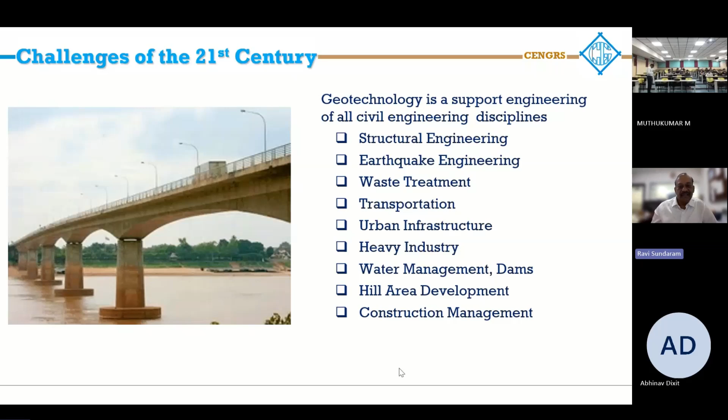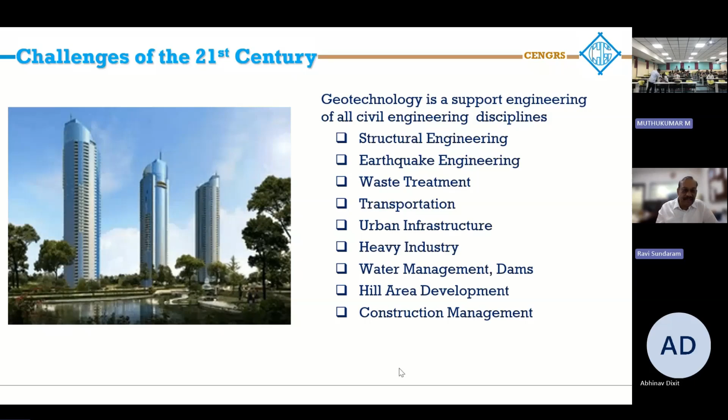So we have to be aware of the challenges of the 21st century. As you know, geotechnology is a supporting discipline for all civil engineering disciplines. And whatever you do, geotechnical engineering is the starting point. Whether it is structural engineering, earthquake engineering, wastewater treatment, transportation, urban infrastructure, heavy industry, water management, dams, hill area development, construction management, everything requires the inputs of a geotechnical engineer.

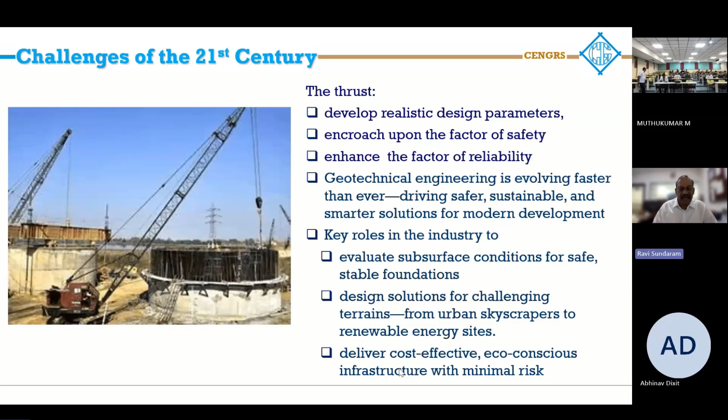The thrust has to be to develop realistic design parameters, maybe encroach upon the factor of safety, but enhance the factor of reliability. So safety versus reliability, that's very important. Today, geotechnical engineering is evolving faster than ever, driving safer, sustainable, and smarter solutions for modern development.

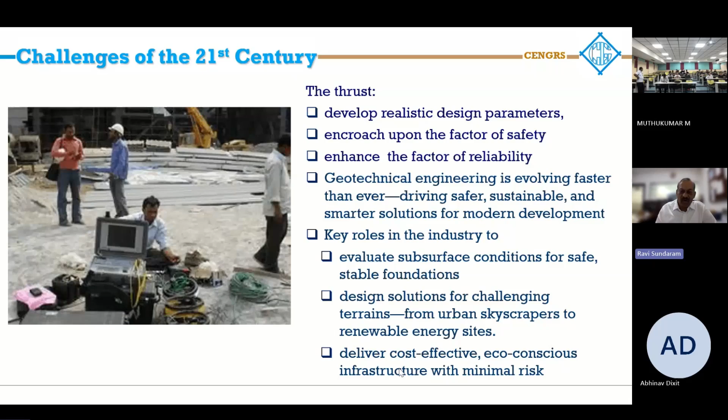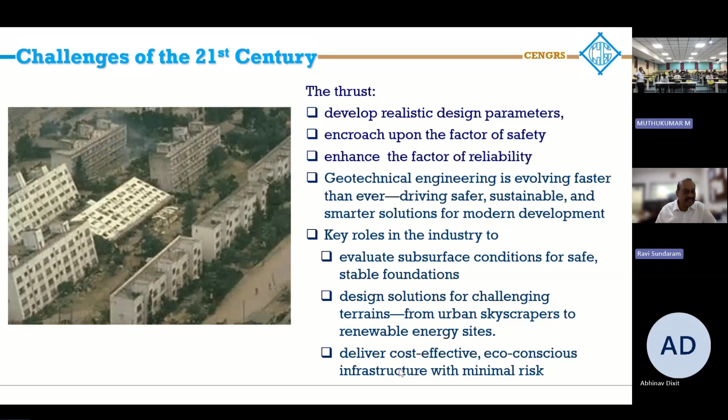So the key role in the industry for the geotechnical engineer is to evaluate the subsurface conditions for safe and stable foundations, giving design solutions for challenging terrains, from urban skyscrapers to renewable energy sites to hill areas, deliver cost-effective and eco-friendly, eco-conscious infrastructure with minimum risk.

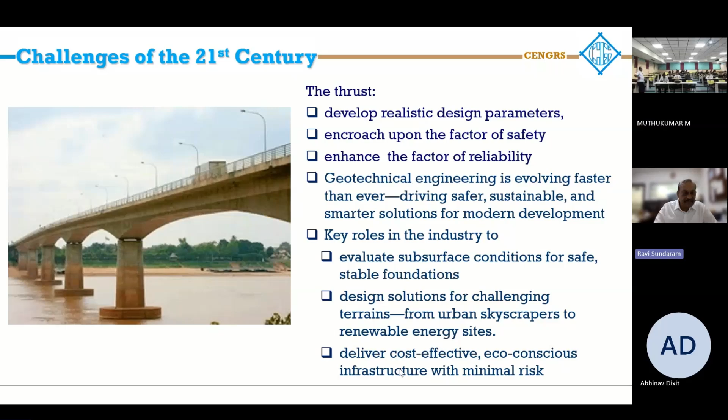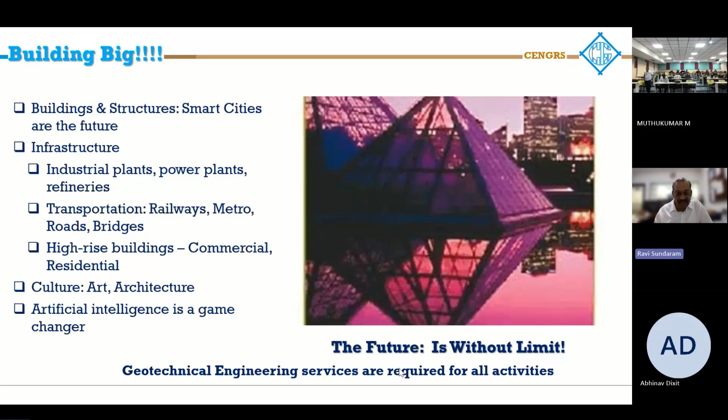Now, today we are talking about building big. Smart cities are the future, and tall buildings, heavy industry, infrastructure like industrial plants, power plants, refineries. In the transportation sector, we have railways, metros, roads and bridges, high-rise buildings, commercial as well as residential, culture, art and architecture. Now artificial intelligence is a game changer, and things have changed a lot with the introduction of artificial intelligence. But for the geotechnical engineer, the future is without limit because geotechnical engineering services are required for all activities.

Let's look at the challenges. Tall buildings, we are talking about 30, 40 story to 100-story buildings, multiple basements, 3, 4 basements also are coming up now, thermal and solar power plants, heavily loaded industrial buildings, bridges and embankments for highways and railways. Now, there is a lot of variation in the ground profile along the alignment of metro tunnels, highways and railways. Expansive soils is another challenging problem which has to be resolved, particularly in the Deccan area.

Construction in weak and poor ground, liquefiable soils. Earthquake is a very critical issue. Fractured rock, hill area development, landslides, dams, embankments. All these things now the geotechnical engineer has to take care of.

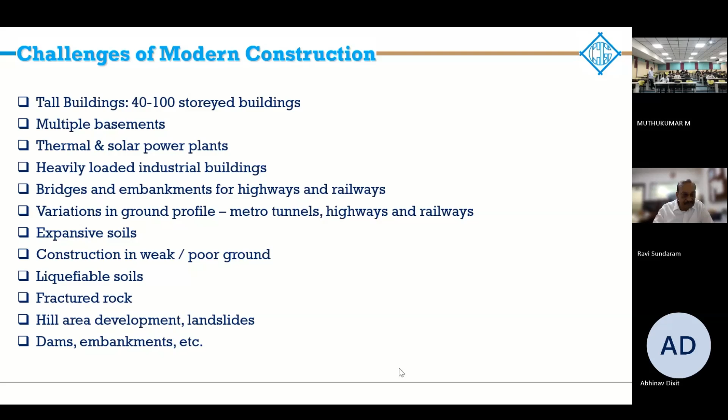And now the projects are all fast track projects. So the demands of fast track projects are that you have to have safer, sustainable, and smarter solutions. You have to come up with solutions for complex problems in minimum time, respond quickly to keep up with the pace of demands of these projects. So design parameters have to be more realistic. Conventional approaches may just not be enough.

You can't talk about a very high factor of safety. You have to squeeze the factor of safety, but you have to make sure that innovation, safety, and economy go hand in hand. So the geotechnical engineer plays a key role in evaluating the subsurface conditions for safe and stable foundations, designing solutions for challenging terrains, delivering cost-effective and eco-conscious solutions. This shall empower the geotechnical engineer to create safe and sustainable future-ready infrastructure, bridging technology with environmental responsibility.

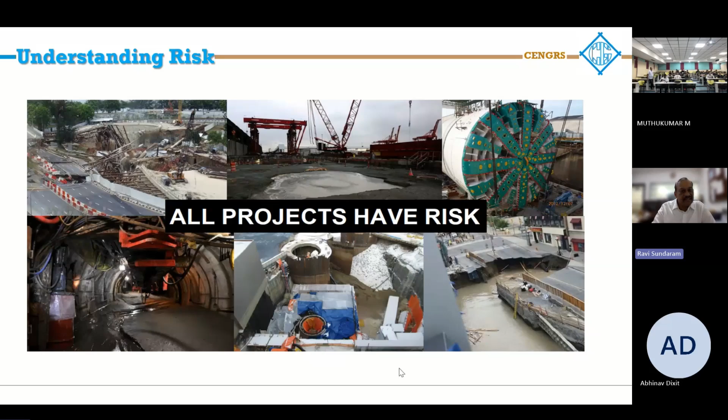Let's try to understand risk. Every project has a risk, and risk is there everywhere when you start geotechnical civil engineering projects. But inadequate geotechnical assessment can lead to incorrect decisions.

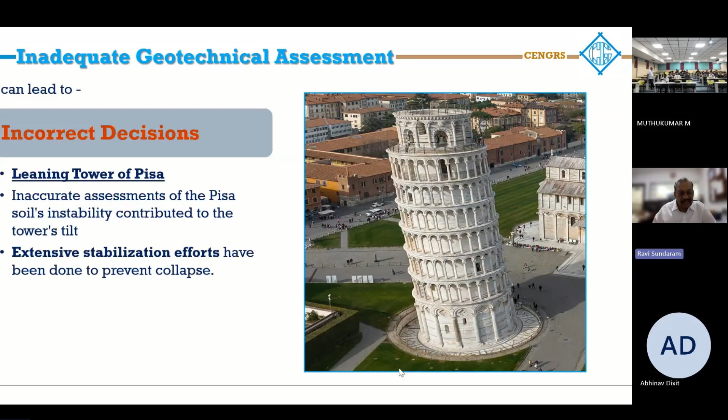The famous Leaning Tower of Pisa, inaccurate assessment of the soil condition stability contributed to the tilt. Extensive stabilization efforts have been done over the past 2 decades to prevent the collapse of this tower.

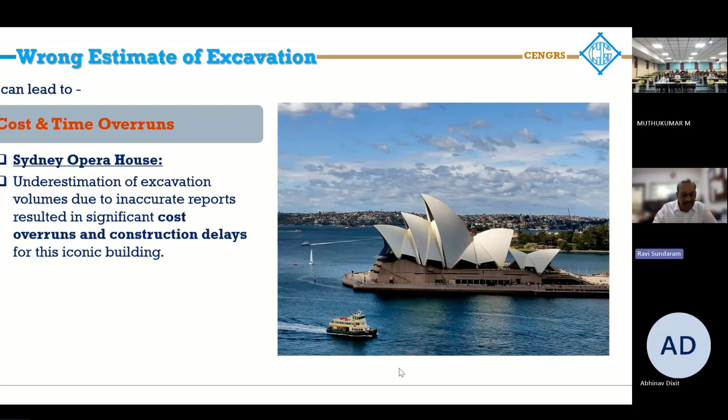Wrong estimate of excavation quantities, the Sydney Opera House, it resulted in cost and time overruns and resulted in significant construction delays for this iconic building.

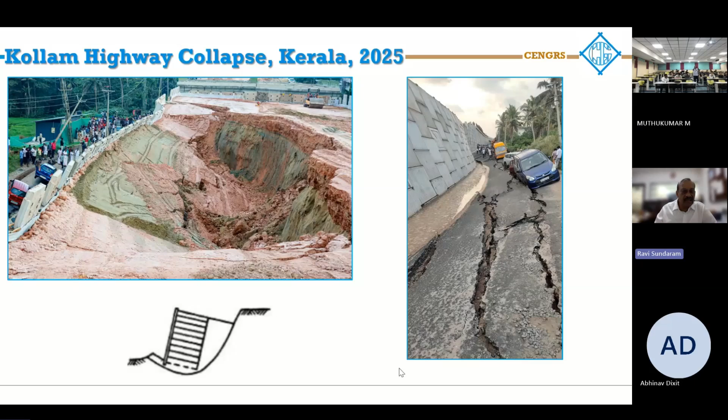Very recently here in Kerala, there was a highway collapse. You can see the consequence of this collapse. So catastrophic failures like the bridge in Bihar, this excavation in Bombay, and here, this is the TBM collapse in Kolkata.

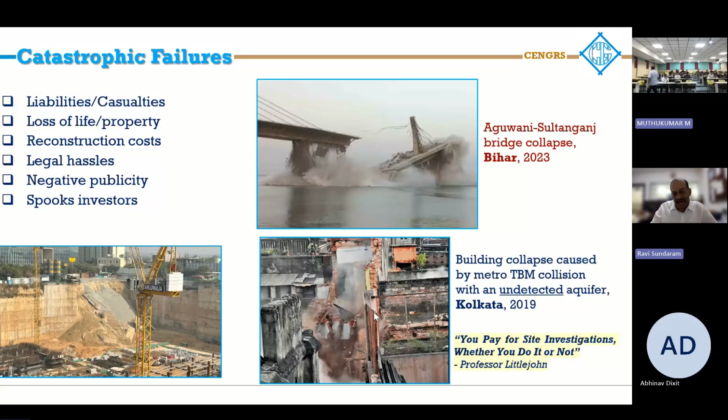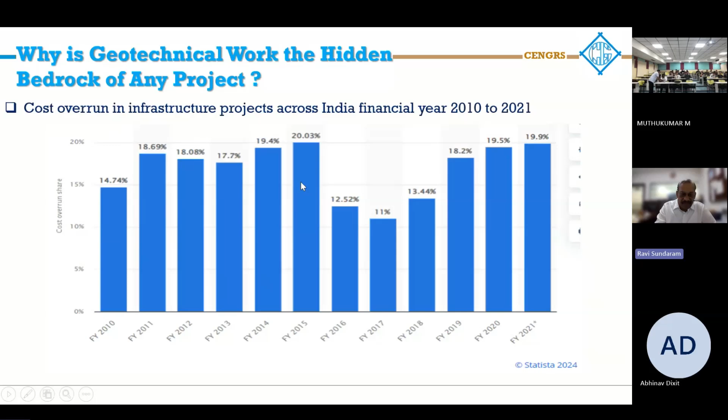Now, you have to be aware that whether or not you do the site investigation, you end up paying for it. So that's what you have to be aware of. Geotechnical engineering is always the hidden bedrock of any project. You can see that from 2010 to 2021, cost overrun on infrastructure projects has been nearly 18 to 20%, and primarily, most of this is due to foundation issues.

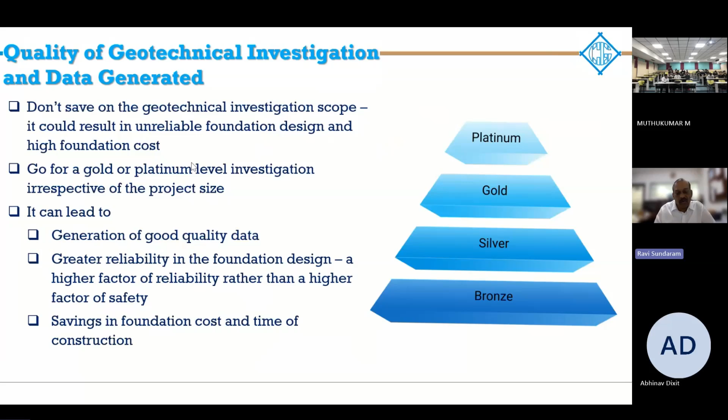Geotechnical investigation practices have undergone revolutionary changes in the past two decades. Conventional boreholes with SPT, sample collection, and laboratory testing are now being supplemented with several in-situ tests to model soil behavior. These include SPT energy measurement, electric cone penetration test with pore water pressure measurement, pressuremeter tests, geophysical tests, and various other tests.

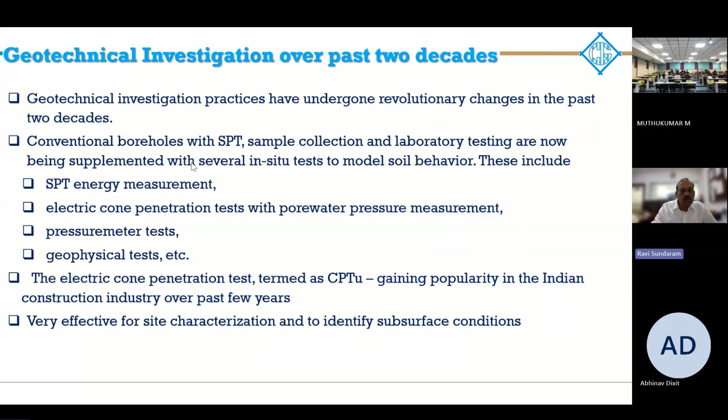The electric cone penetration test, also called CPTU, is gaining popularity in the Indian construction industry over the past few years. It is very effective for site characterization and identifying subsurface conditions. So these tests should be included in the scope of the investigation.

I'm now going to present three case studies illustrating the application of geotechnical engineering concepts for foundation design in various challenging situations. The first one is a 42-storied residential commercial tall building in Gurgaon, Haryana; grain silos in rural Kanpur, UP; and wind turbines in liquefiable silts in Kutch, Gujarat.

The first case study is a 42-storied residential commercial building, a tall building in Gurgaon. The site covers an area of about 11.4 acres, a high-rise housing complex consisting of 11 towers of 42 stories each, with 2 basements. Other facilities planned include a clubhouse, tennis and volleyball court, swimming pool, etc.

The project is planned in 4 phases: 3 towers, clubhouse and swimming pool in the first phase, 3 towers in the second phase, 2 towers in the third phase, and 3 more towers in the fourth phase. The tower building is a framed structure with a podium.

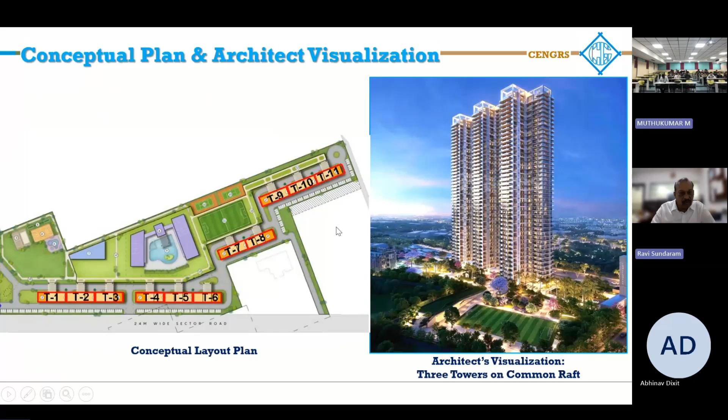The investigation scope covered 22 boreholes to 60-meter depth and 5 to 30-meter depth. SPT energy transfer ratio was measured for the rigs used; in this, you standardize the SPT value corresponding to 60% energy transfer. 43 electric cone penetration tests were also done, and pressure meter tests were done in 4 boreholes.

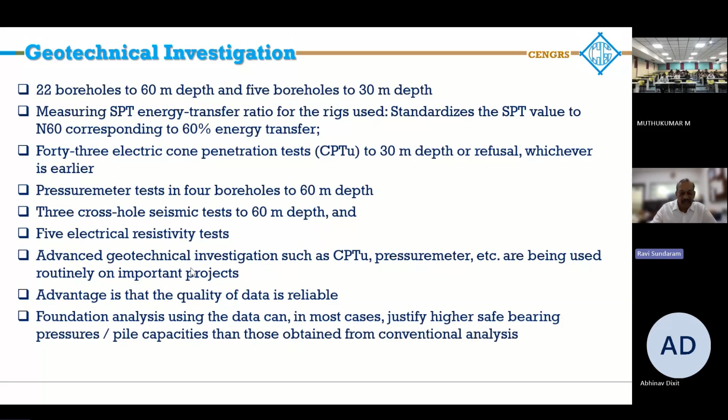3 crosshole seismic tests were done to 60-meter depth, and 5 electrical resistivity tests. So advanced geotechnical investigation methods like CPTu and pressuremeter are now being routinely used on these important projects. The advantage is the quality of data is reliable, and you can justify higher bearing capacities in most cases, and higher pile capacities compared to what you can get from conventional analysis.

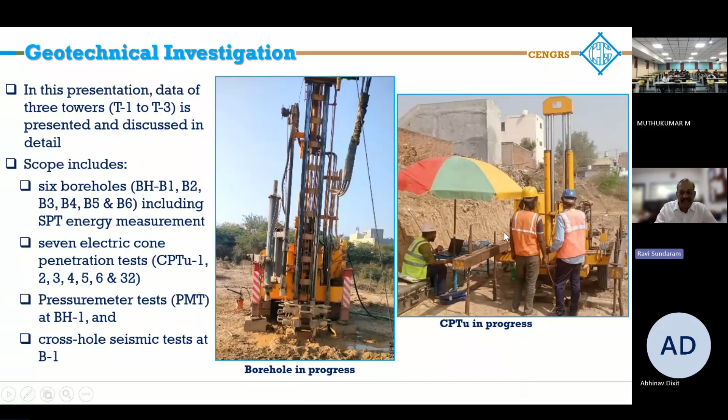Let's look at the geotechnical investigation done here. I'm going to present towers T1 to T3. Here I had 6 boreholes, 7 cone penetration tests, and pressuremeter test in 1 borehole and crosshole seismic test in 1 borehole. You can see the investigation drilling borehole in progress and the CPTU in progress here.

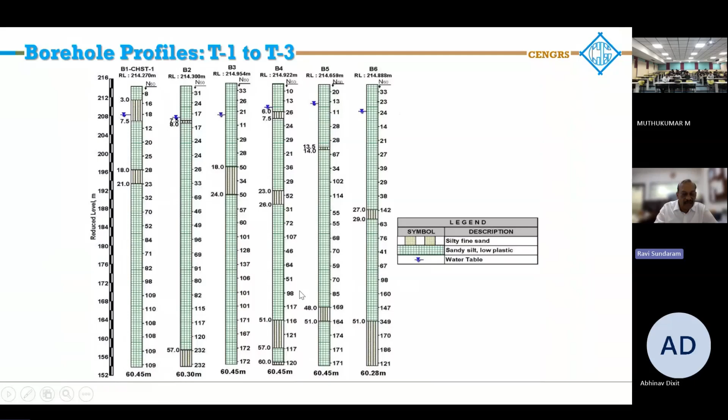This is the strata which we interpreted from the CPTU. Some locations there were a little bit more sand layers, but most of these tests met refusal at around 30 meters.

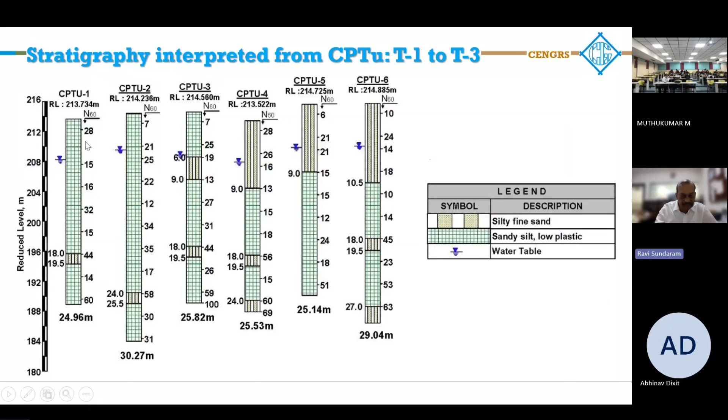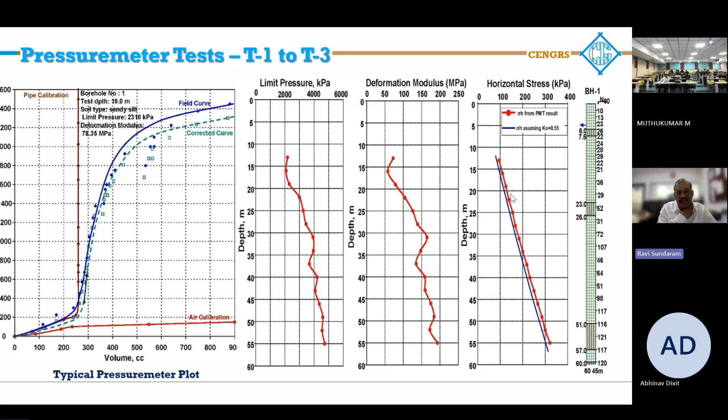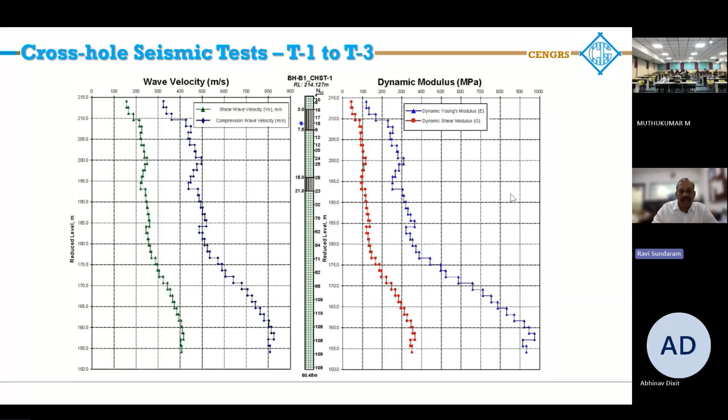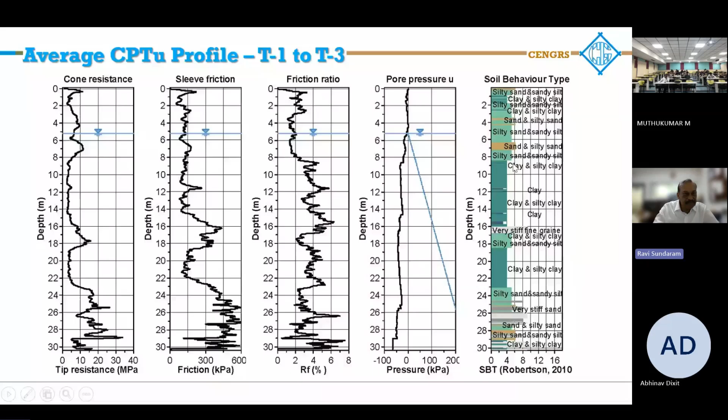So now using the CPT data, what we did was we tried to interpret how it correlates with the various geotechnical parameters like SPT.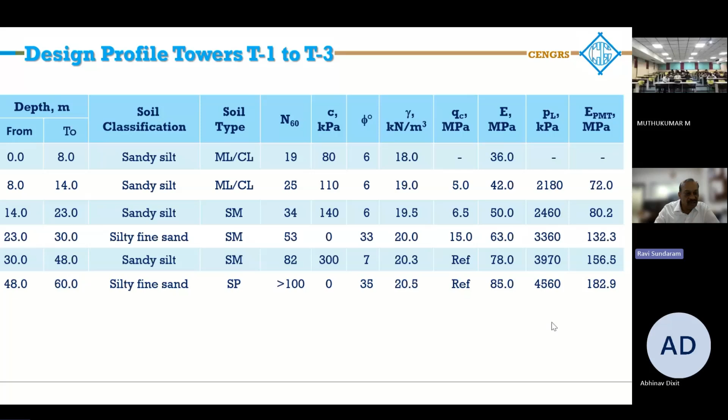So we did the bearing capacity analysis. As you know, bearing capacity analysis and settlement analysis is done for foundations, and what you would like to do is select the lower of the 2 values from the bearing capacity analysis and the settlement analysis. The bearing capacity analysis was done for the isolated foundations and raft foundations using conventional analysis with c-phi values as per IS 6403.

Then, of course, the CPT profile using the correlations given by Robertson, and also the pressure meter test. We calculated for a 3 meter by 3 meter size foundation at 9 and 11 meter depth. The conventional analysis gives you a value much lower than what you would interpret from the CPT or the pressure meter. So looking at these numbers, a somewhat middle value was selected for foundation analysis.

So we picked 550 kPa at 9 meters and 650 kPa at 11 meters. For a 10 by 10 meter size raft, the analysis indicated similar trends, and 600 and 665 was selected at 9 and 11 meter depth. So this was the upper limit.

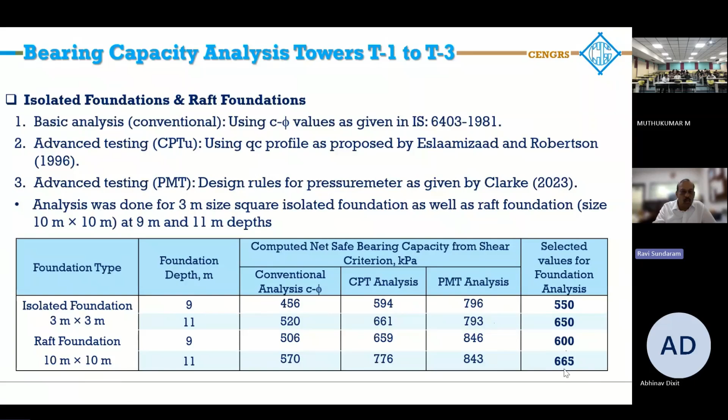So we would have to check with the settlement analysis to decide what would be the allowable bearing pressure. This is the bearing capacity plots at 9 and 11 meters for a 3 meter by 3 meter and a 10 meter by 10 meter size foundation.

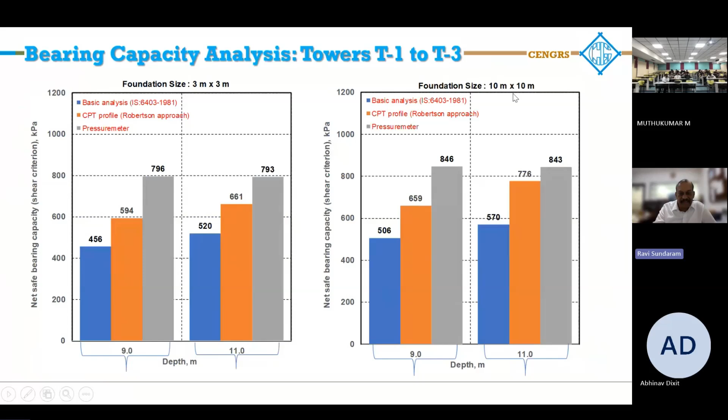Now the settlement analysis, again using the three methods, we were able to assess the settlement. For isolated foundations, a permissible settlement of 50 mm was considered, and for raft foundations, permissible settlement was taken as 75 mm.

Using this, the selected values, when you are doing the analysis, you have to restrict it from shear, whatever you got in shear. So these are the numbers which were selected for the foundation design. This is the settlement analysis for a 3 meter by 3 meter and a 10 meter by 10 meter size raft.

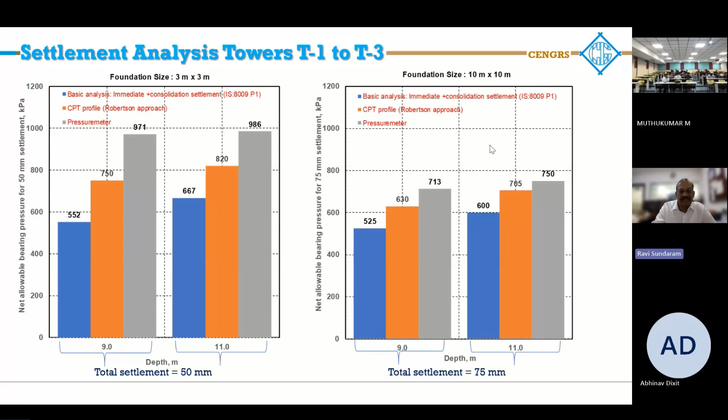So the lower of the two values were selected. Isolated foundations: 550 kPa at 9 meter depth and 650 at 11. Raft foundation: 580 at 9 and 650 at 11.

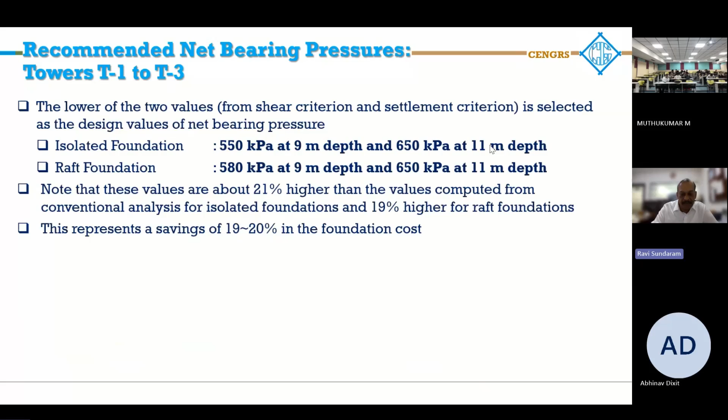Now you can see if you had done this by conventional analysis, you would have been in the range of 400 to 450, which has been increased substantially to up to 650 for the raft. So you have got about 21% higher for isolated foundations and 19% higher for the raft foundations. This is a huge saving in the foundation cost. But what was done actually was a hybrid pile raft foundation was used, and the piles were used as a settlement reducer because the applied bearing pressure was coming around 1300 kPa.

So 1000 mm diameter, 30 meter and 35 meter long piles were analyzed with cutoff level at 11 meters. Again, three different analyses were done using the conventional approach, the CPTU, and the pressure meter.

So for the 30 meter long pile, you can see the CPT was giving the maximum higher capacity, but the conventional approach was the lowest in all cases.

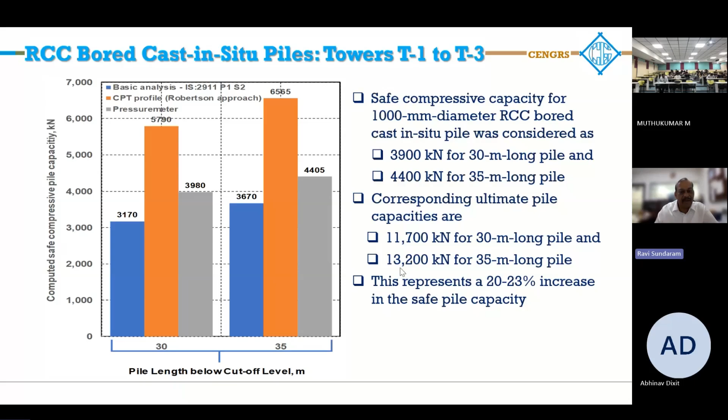Reviewing all this, we selected a value of 3900 kilonewton for a 30 meter long pile and 4400 kilonewton for a 35 meter long pile as corresponding ultimate capacities. You can see 11,700 and 13,200 kilonewtons. This represents a 20 to 23% increase in the safe pile capacity compared to the conventional approach.

The soil structure interaction was then done using Plaxis 3D software for the design of the pile raft foundations. The soil layers were modeled as linearly elastic, perfectly plastic materials following the Mohr-Coulomb yield criteria. Raft and piles were modeled as linearly elastic materials.

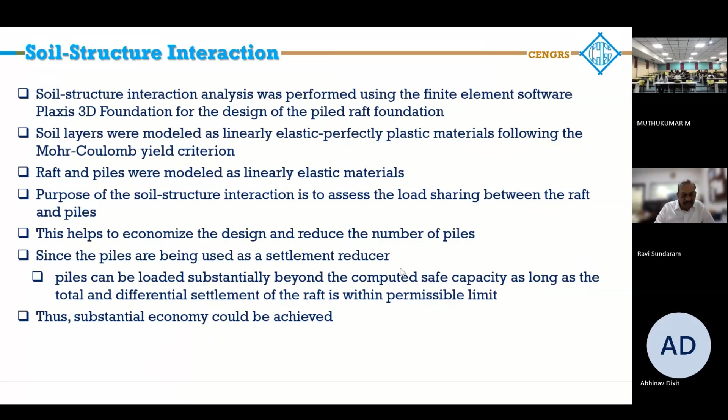The purpose of the soil structure interaction is to assess the load sharing between the raft and the piles. This will help economize the design and reduce the number of piles. Since the piles are being used as a settlement reducer, they can be loaded substantially beyond the computed safe capacity as long as the total and differential settlement of the raft is within permissible limits. Thus, you can achieve substantial economy.

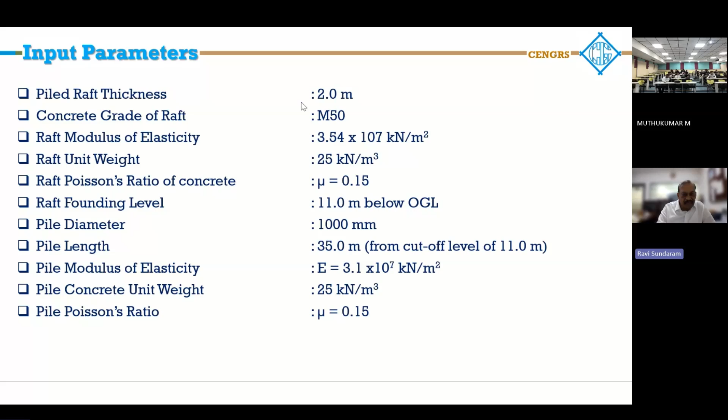So these are the input parameters: a 2-meter thick raft, concrete grade M50. You can see the E values, unit weight, Poisson's ratio for the concrete raft foundation, obviously at 11-meter depth. We had 35-meter long piles from the cutoff level of 11 meters.

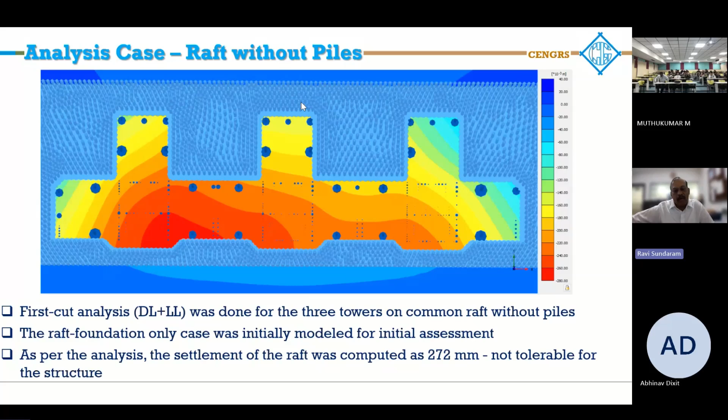So this is the foundation layout, the 3 towers. The first cut analysis was done using raft without piles. As per the analysis, the computed settlement of the raft was 272 mm, not tolerable for the structure because IS 1904 permits a maximum of 125 mm. So we had to go for piles.

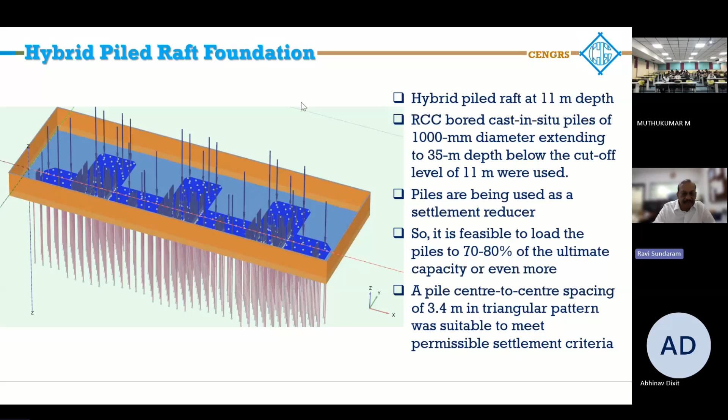So this is safe. Most of the piles had a load around 7,000 to 8,000 kilonewtons, which is 53 to 61% of the ultimate pile capacity. Only one pile was loaded to about 76% of the ultimate pile capacity.

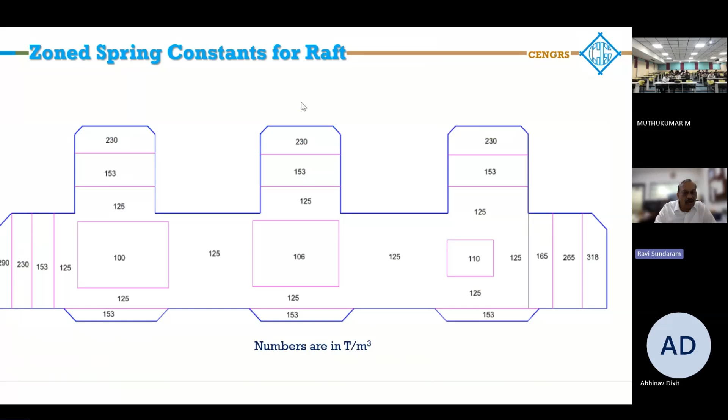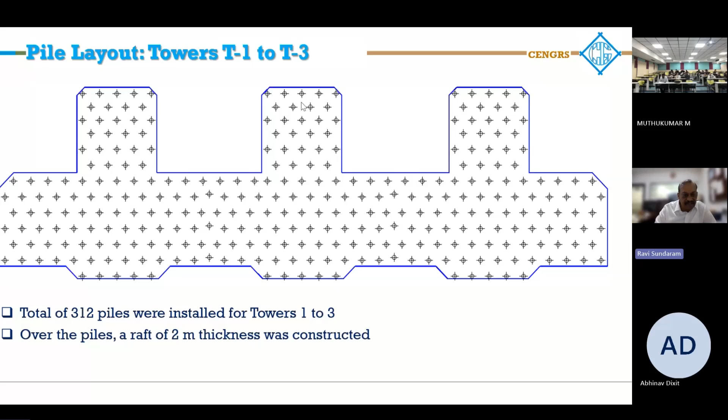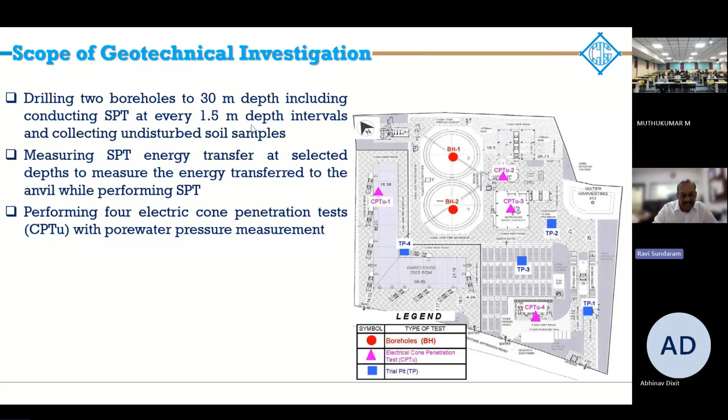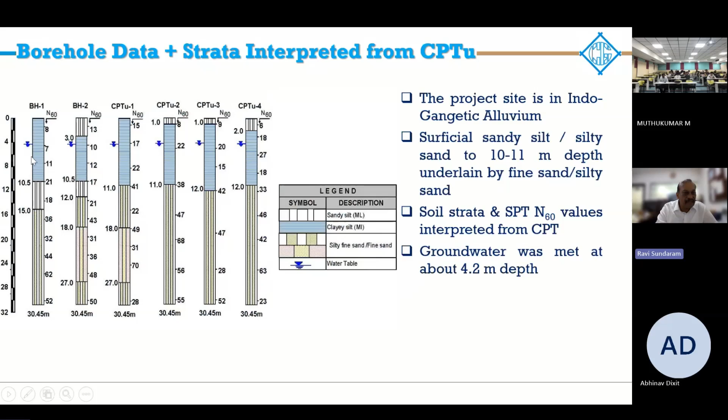The boreholes and stratigraphy interpreted from the CPT show that below around 10-11 meter depth, sand is encountered. The upper layer is silt. Water table is met around 4 meter depth. So this is the stratigraphy here.

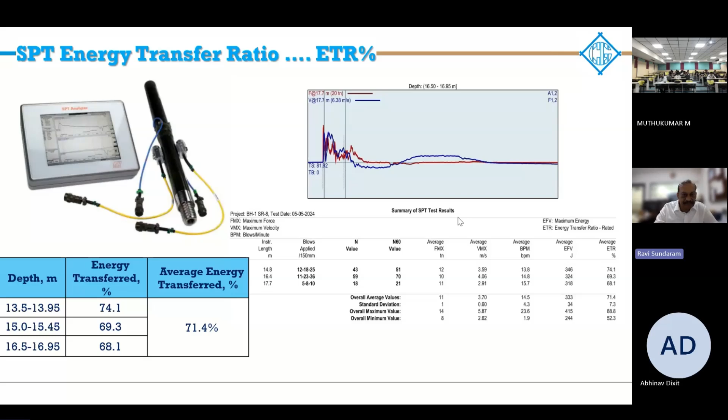Again, SPT energy measurement showed an average energy transfer of around 71.4%. So this is what was used here. You can see N60 versus depth. The actual field N value is shown in dotted red, and after correction, you get the corrected SPT values.

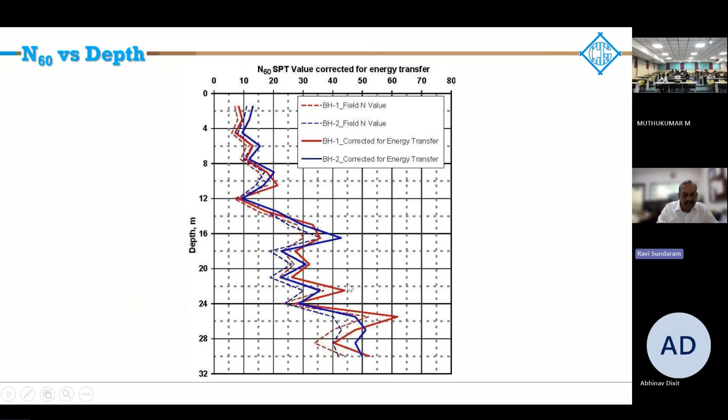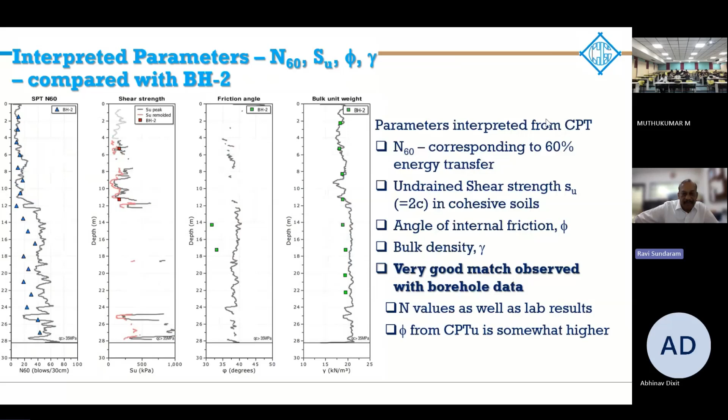You can see here whether it is SPT, undrained shear strength, or friction angle. Of course, friction angle was somewhat higher compared to what you get from the direct shear test in the lab. Otherwise, all the parameters are showing a good match.

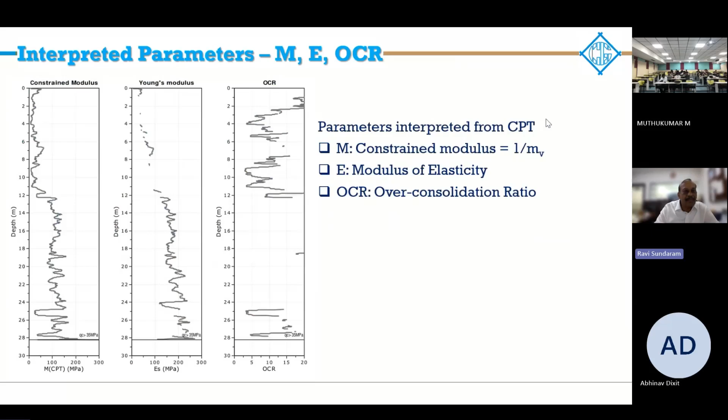So E-values were interpreted from various correlations. You can see here, due to CPT, the E-value increase was substantial, between 42 and even 57%.

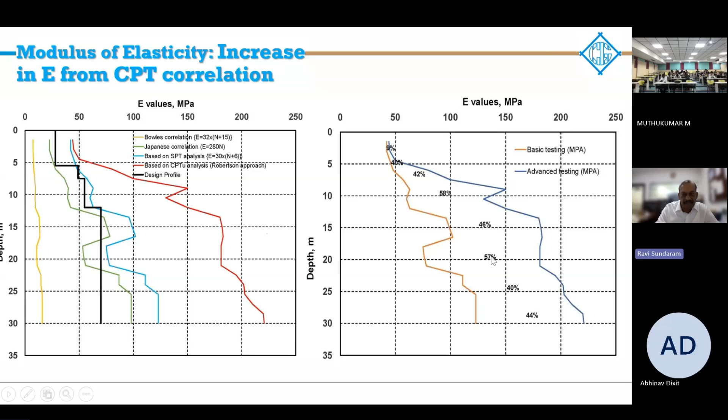So for bearing capacity analysis, we did it for a 3 meter by 3 meter size foundation and a 6 meter by 6 meter foundation at 2 meter depth. From the IS code approach and CPT Robertson approach, for a permissible settlement of 50 mm, there is an increase of 74%. Similarly, for a 6 meter by 6 meter size foundation at 2 and 4 meter depth, you get about a 48% increase. Also, the silo was a 32 meter diameter circular raft, and here we got a 100% increase in SBC value.

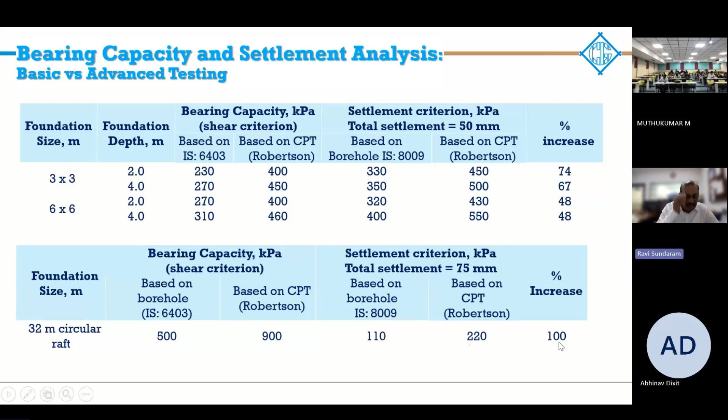So obviously this is the impact here - we were able to interpret much higher values. This is the 3 meter size foundation, the 6 meter size foundation, and this is the 32 meter diameter raft. Since the bearing capacity increased substantially, ground improvement was not required for the 32 meter raft.

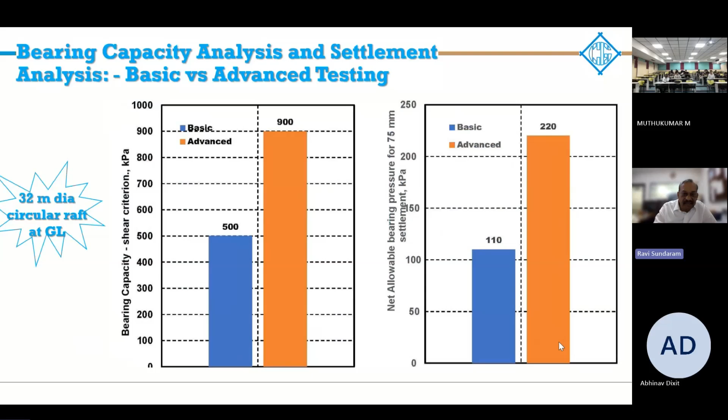So conventional analysis had suggested only 110 kPa, but because the loading was much higher, the decision earlier was that we should go for stone columns to increase the bearing capacity, but we could prove from the CPT that it is not required. So huge saving - extra large financial cost, as well as 2-3 months to install the stone columns. So the CPT proved that the natural soils will be able to support the silo foundation.

The saving here was very substantial, on the order of about 3.5 lakhs per silo - sorry, 3.5 crores per silo, about 7 crores for 2 silos - whereas the cost of additional testing was only 5 lakhs. So that's around 14,000% return on investment by just using the CPT.

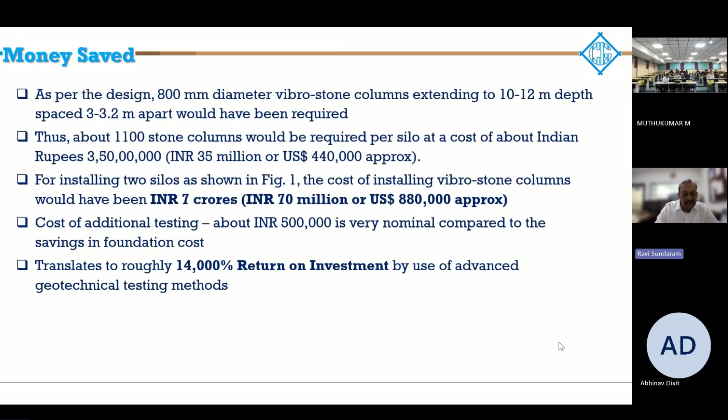I now move on to the third case study, wind turbines in liquefiable silt. We have to realize that even silts can liquefy under certain conditions.

Renewable energy and wind turbines are something which are now the talk of the country. India's renewable energy goals and the global transition to cleaner energy has spurred installation of these wind turbines to harness wind energy to boost energy generation. Over 50% of the power is targeted to be generated from renewable sources over the next few years.

So about 4 gigawatts of wind energy-based power will be generated from the Kachchh region. The Kachchh region, western Gujarat, witnesses high solar irradiation making it ideal for solar energy generation. It is also blessed with one of the best wind resources availability in India, with speeds of up to 8 meters per second. So this means we can generate power from solar energy as well as wind energy.

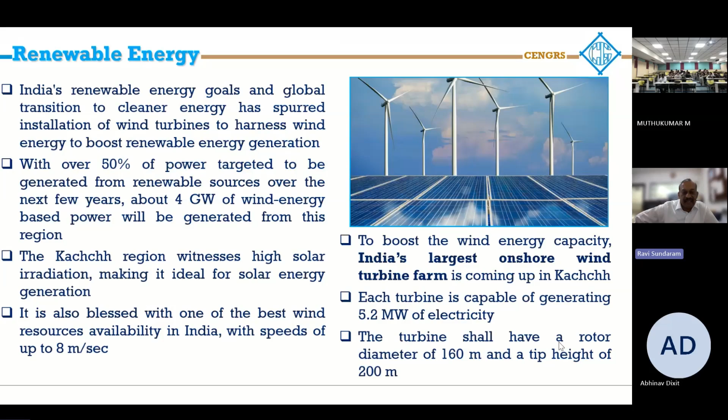So to boost the wind energy capacity, India's largest onshore wind turbine farm is coming up in Kachchh. Each turbine is capable of generating about 5.2 megawatts of electricity. Hundreds of these turbines are being installed in that area. The turbine shall have a rotor diameter of 160 meters, and the tip height is 200 meters.

So here I will be presenting one typical wind turbine in the soft non-plastic silts. It explains the characterization of these soils and the implications for design. At each turbine location, we did one borehole of 25-meter depth, one crosshole seismic test, one electric cone penetration test, and one electrical resistivity test. You can see the borehole in progress here and the CPT being done.

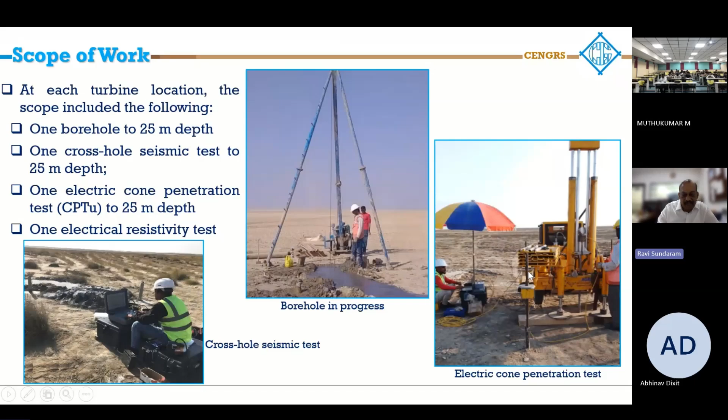The geology in this area is that it came under marine transgression during the Jurassic period. The soils in the area are coastal alluvial sediments, characterized by high salinity and shallow water table.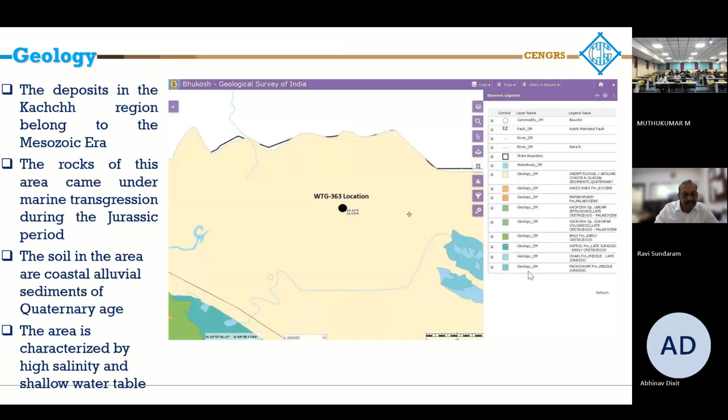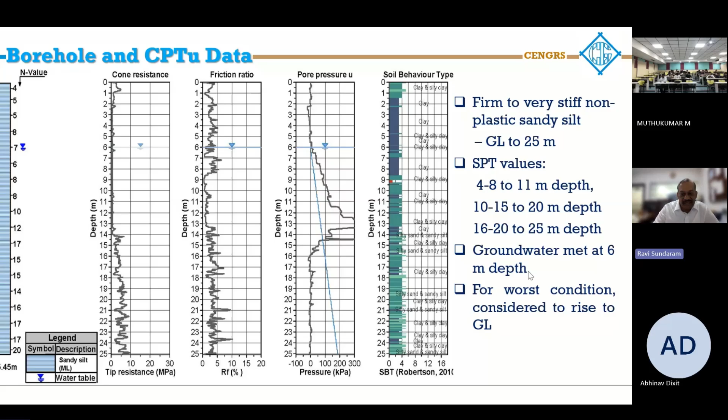So this is the CPT results. You can see it is a firm to very stiff non-plastic sandy silt. SPT values of 4 to 8 at 11 meter depth, 10 to 15 at 20 meter depth, and 16 to 20 at 25 meter depth. Groundwater at 6 meter depth - worst condition because it's very close to the sea. It was considered to rise to ground level.

So the results of the crosshole seismic test show the shear wave velocity and the primary wave velocity. From this we interpreted the dynamic modulus and shear modulus. The CPT shows a very good match with the SPT borehole data. Similarly, the density also shows a good match, and the undrained shear strength also shows a very good match. Constrained modulus and shear wave velocities from the crosshole seismic test - the constrained modulus is 1 divided by MV - so you can use this for the consolidation characteristics.

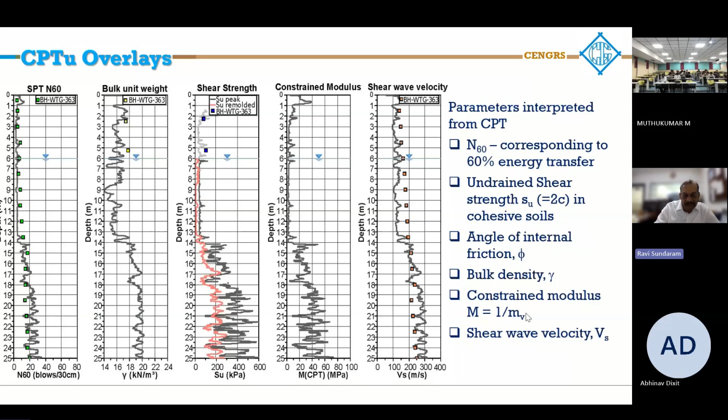Now look at the soil gradation. You can see here that the sand content is 25 to 35%. The silt content is 67 to 78%, with clay content of less than 3%, that is less than 0.002 mm. 0.005 is 9 to 12%.

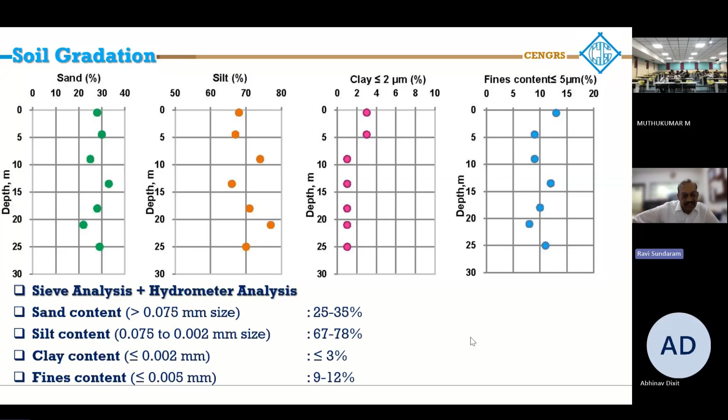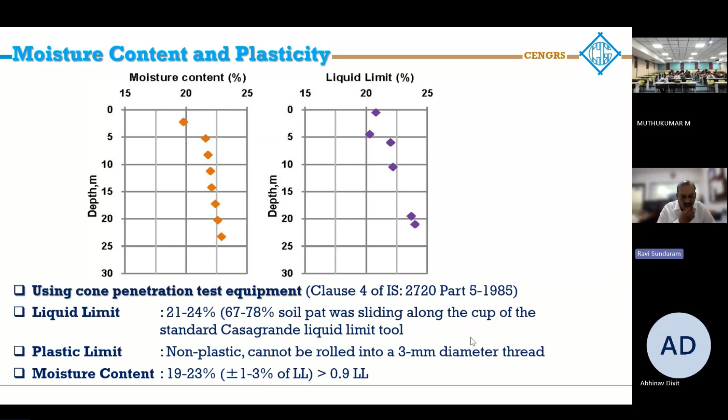This is the moisture content and liquid limit profile. Low liquid limits, significantly less than 25. The moisture content is close to the liquid limit. As far as the plastic limit is concerned, we couldn't determine it. It is non-plastic; it cannot be rolled into a 3 mm diameter thread. So this is a non-plastic silt with moisture content very close to the liquid limit.

Now, liquefaction analysis was done. This area is in earthquake zone 5, design magnitude of 7.5, peak ground acceleration of 0.36 G. SPT automatic hammer was used, and the design groundwater table depth was at ground level.

The analysis method used SPT values and gradation characteristics as per IS 1893/2016, and also the NCEER summary report given by Youd and Idriss, based on CPT resistance as well as shear wave velocities and SPT.

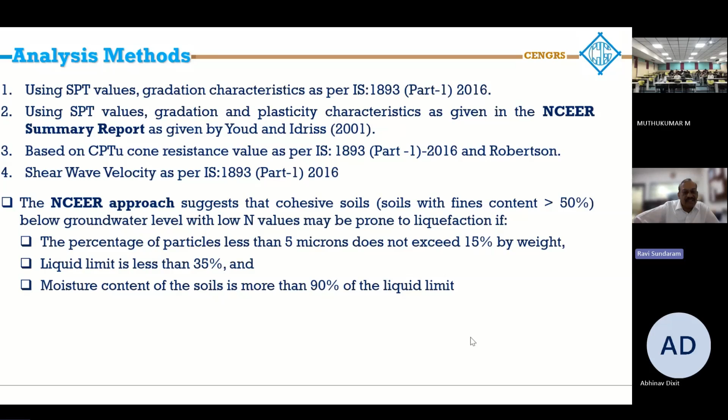The NCEER approach suggests that cohesive soils, containing more than 50% silts and clays below the water table with low N values, will be prone to liquefaction if the percentage of particles less than 5 microns does not exceed 15%, the liquid limit is less than 35%, and the moisture content is more than 90% of the liquid limit.

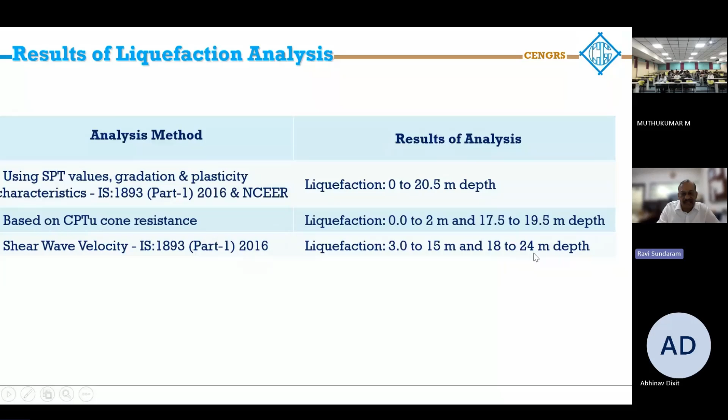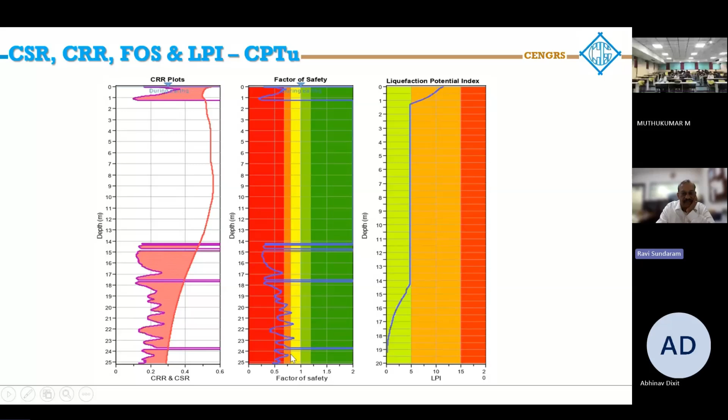Similarly, from the CPTU, it is showing substantial liquefiable results, and also from the shear wave velocity. So this is just plotted here for your convenience.

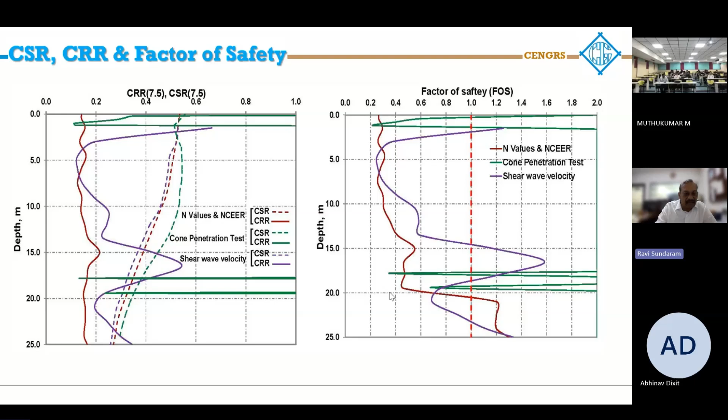With this, I conclude that geotechnical engineering as a field requires a clear understanding of soil behavior. Selection of foundation type should be done on the basis of a well-planned and detailed geotechnical investigation, assessing the technical requirements and risks properly so as to tailor the scope of investigation to determine the critical parameters that influence the safety of the structure.

A judicious inclusion of advanced in-situ tests like CPTU, pressure meter, and geophysical tests is required for a better assessment of safe bearing capacity.

CPTU and pressure meter profiles give a much more realistic and reliable evaluation of the foundation behavior. The good quality data can be correlated very well with the various engineering parameters, in comparison to conventional analysis using borehole data only.

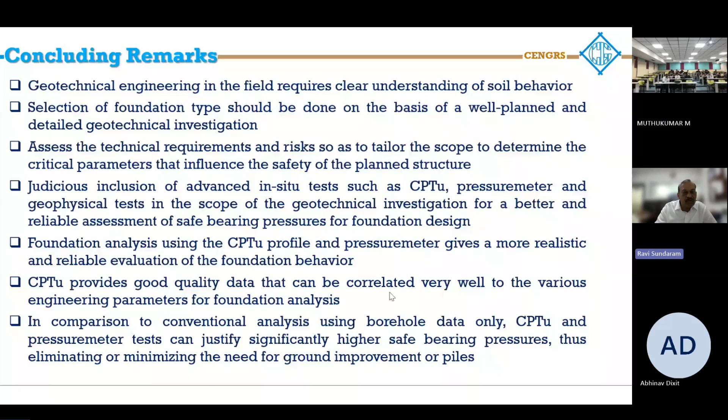These in-situ tests can justify safe higher bearing pressures, thus eliminating the need for ground improvement or piles. With a better understanding of technology, geotechnical engineers can ensure reliable and economical foundation designs.

The cost benefits that can be reaped by performing advanced tests such as CPTU, pressure meter, SPT energy measurement, and geophysical tests can be enormous. But to be able to do this successfully, you have to live with the soil, breathe into its soul, and be a part of it, understand how it behaves, and contribute to understanding soil behavior and be able to assess what is required.

Thank you very much, I'll be very happy to take questions. I'd like to end by saying that geotechnical engineering is a science, but its practice is an art.

Thank you. I have one question, sir, regarding this high-rise building in Noida. Yes, sir. So the soil is almost silty up to a depth of 60 meters, and you have adopted the piled raft foundation. Whether any liquefaction analysis has been done, sir?

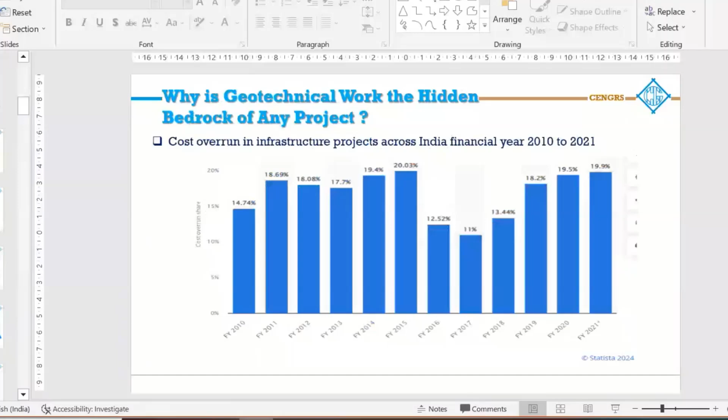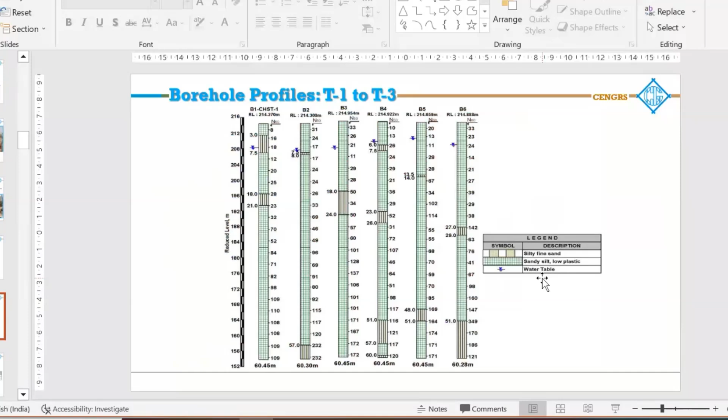Yes, liquefaction analysis was done, I didn't include it here. Here the soils were non-liquefiable. Let me go to the strata here. If you can see, the soils are mostly silts with very small thin sand layers. Therefore these were not prone to liquefaction.